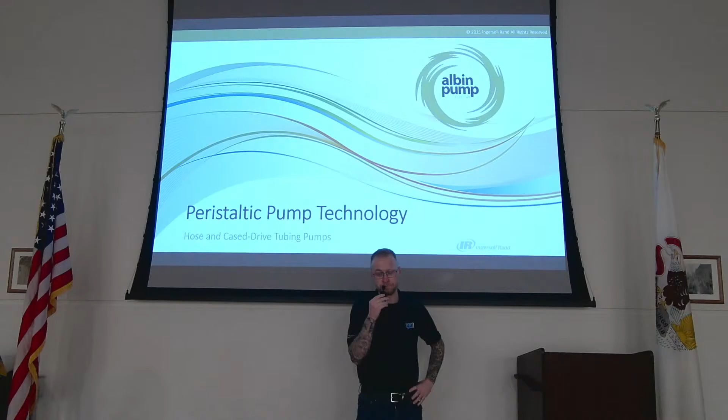I've got two speakers with me today. I've got my friend Sean and Charlie, who will be on after him. Sean is going to be talking about peristaltic pump technology, and Charlie is going to be talking about some big bubble mixing technology.

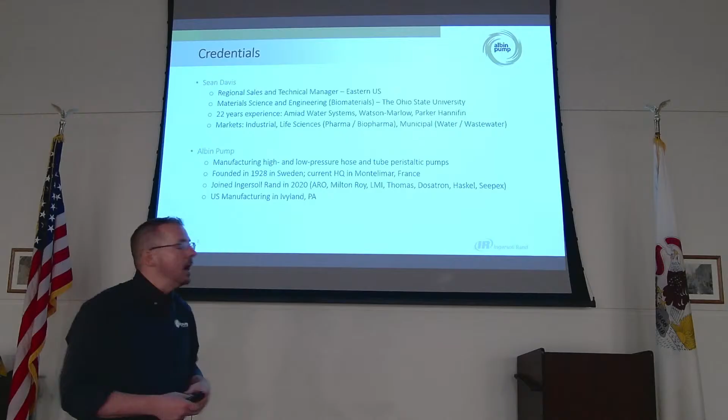So our little niche within Ingersoll Rand is Albin is focused on peristaltic pumping technology. You may be familiar with Ingersoll Rand and know them for their compressors or other brand names that they have, specifically Milton Roy, LMI, Aro. But again, this is just one of the different pumping technologies that we offer.

So Albin was founded in 1928 in Sweden. The manufacturing current headquarters is now in France. We also have U.S. manufacturing just outside Philadelphia in Ivyland. So we know that's a big deal with certain projects that come through, especially anything that needs to be BABA compliant. We can meet that with certain of our products.

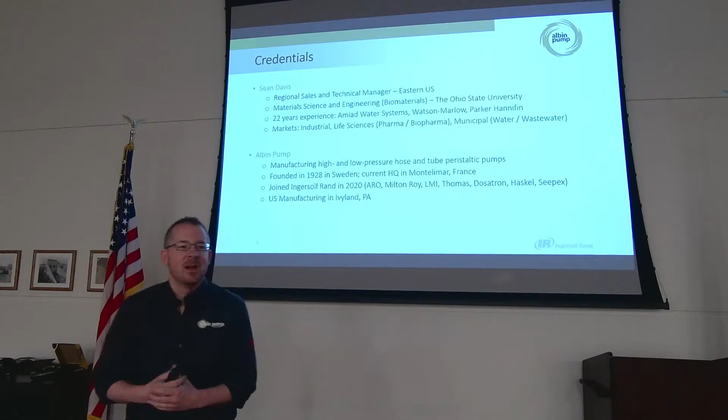But as far as myself, engineering background, I cover the entire eastern half of the U.S. There's actually 3 of us working for Albin. We actually all came from a competitor, but we're all ingrained into the pumping technology, and in specific peristaltic pumping technology. So we're going to talk about 2 different types that we offer, our hose pumps and our tube pumps.

Our hose pumps you're going to see are more for that high pressure transfer, wastewater treatment applications that you may have, anything that's got a viscous, abrasive, corrosive, fibrous product going through it. These hose pumps are what you're typically going to look at there. Whereas on our tube pumps, you're typically looking at the water treatment side for those types of applications. Those are a little lower flow, lower pressure, more of a dosing, more precise measurement of any of those chemicals that you're putting into your line.

So peristaltic working principle, it's a real easy one. The human body has mastered this with swallowing. That's the same thing, that's peristaltic technology. What we're doing is we're using 2 shoes on our hose pumps, or what we call rollers on our tube pumps. And what those are going to do, they're mounted 180 degrees apart, and they are going to squeeze the hose or the tube that's inside that pump head.

And so the compression, the squeezing, that occlusion of the hose is actually going to draw in any of your fluid, any of your material into the pump. And then it gets moved around as those shoes or those rollers continue on throughout the pump head. And then on to discharge for you.

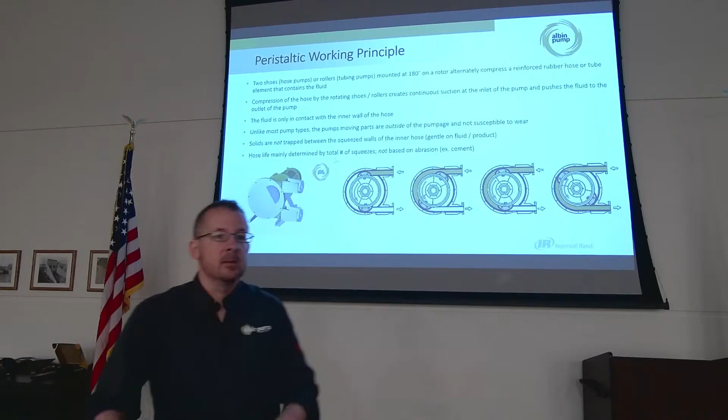So with the advantage to this, and probably one of the biggest selling points on this, why is this technology important? Well, 2 of the things we tout on this. One is your only wetted part, the only part that's coming in contact with your fluid is the inside of the hose or the tubing. None of the shoes, none of the pump, it's not susceptible to wear because it's not going to be immersed in your fluid. So literally your tube or your hose is the only thing touching your fluid in your processes.

What's nice about it is it's actually a gentle process. Outside of what you see with municipal wastewater, water treatment, this is a big technology for biopharm where you can't lyse the cells. You have to be gentle with them. Olives, fish. I mean, it's all things that have been used in the peristaltic pumping technology world simply because it is a gentle process.

Your hose life, this is a nice point here too, and something I want everyone to know, is your hose life is mainly determined by the number of squeezes of the tubing, not by the abrasiveness or the fibrous nature of your material or your fluid going through that.

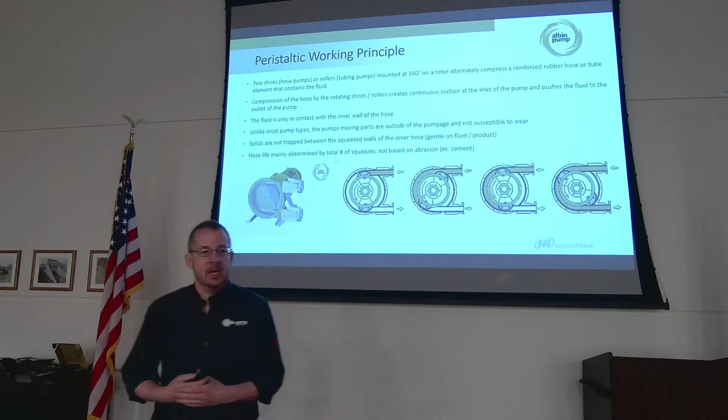So based on the number of squeezes, that's where you're going to be looking to do your hose changes or your tubing changes, not based on the material that you have inside. So we have different types of hose and different types of tubing that are meant to be chemically compatible with any of those chemicals that you may be using as well. So it's a variety of hoses or tubing that we do offer.

By a show of hands, anyone use peristaltic pumps now or familiar with them? Okay, cool. So I like that. That's good.

So we already talked about how it's the one wear part. It's that hose that you have. The advantage to this is the pump can be repaired or maintained in place. There are some alternative brands where you actually have to send in the pump to get it maintained or get it fixed. Here, you're able to replace that hose on site. You don't have to move it. You just want to ensure that there's a minimal distance, and I'll show that later, for being able to put that hose in or take the hose out from your pump.

But an advantage to peristaltic technology is that the pump orientation or port orientation is any one of 90 degrees. So it's meant to be able to be put in place where you have the space. You don't have to create the space for it. We offer different port orientations to allow for ease of operation, ease of maintenance, and ease of putting it on site.

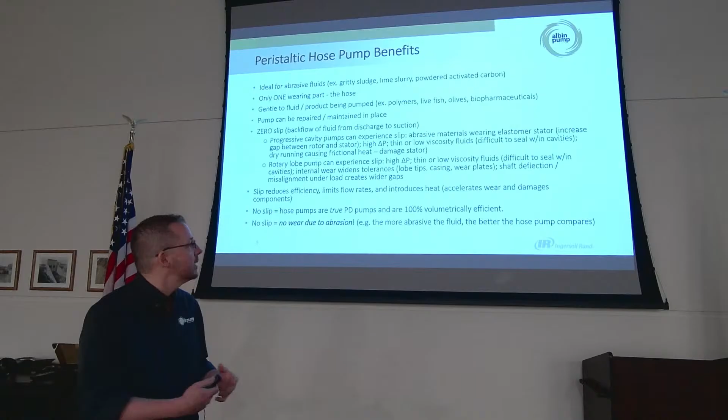What you see with peristaltic technology, it is truly a positive displacement pump. It means you are moving 100% of the fluid through. You can recover all of that fluid as well. If you ever have a blockage or ever have an issue, it can actually be reversed in place. There's nothing special needed for that, so you can actually clear the line. You can remove any of that fluid that you have in that pump head, so you are truly getting 100% flow or fluid movement.

It also can run dry, which not a lot of the other pumping technologies can, and you will not suffer vapor lock because it can move those gases through the line as well. So a couple advantages to the peristaltic technology there. So I've already mentioned a few of these things here. No wasted product, no seals to leak or to wear out on these pumps.

What's nice is that, again, we talked about some of that bigger material. You can have up to 65% solids that can be pumped and material that's up to 25% of the internal diameter of the hose. So there's a wide variety of sizes of these hose pumps. So if you had one of those applications where you're getting a lot of fibrous material through or a lot of sludge coming through, these are able to handle that without difficulty.

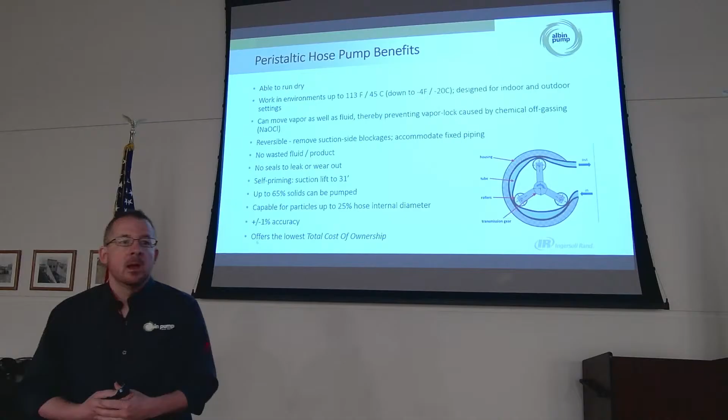With putting peristaltic pumps in place, you could get up to 31 feet of head vertically. Horizontal distance isn't as much of a consideration, but one of the best practices for peristaltic technology is you want to get it as close to your application as possible. It is more of a consideration when we're talking vertical distance, not necessarily horizontal distance. It will pump what you need horizontally.

So you see in a picture here, this one actually has 3 rollers. We offer some 3-roller peristaltic pumps, but we find 2 shoes or 2 rollers inside is going to be a best practice here. The simple reason for that is the more rollers you put in, the more squeezes you're going to have, and then you're going to wear your tube life faster. And again, that's what we're trying to avoid.

Claim to fame for peristaltic technology is that it's going to be operator friendly, maintenance friendly, and low maintenance time to simply change out the hose or tubing. A majority of the peristaltic pumps out there utilize the 2 shoes or 2 rollers so that they can put through as much fluid as possible for that size pump, as well as not squeeze the tubing or the hose more than is necessary. Any questions so far?

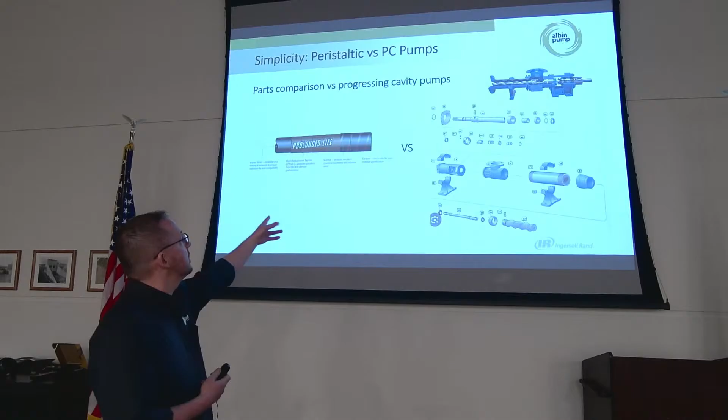So some of the advantages that you'll see here versus some of the other technologies is literally your only wear part, we've just talked about this, is going to be the hose, whereas you have a lot more parts that you have to worry about maintaining on, say, progressing cavity pumps, the stator wearing out, burnout. It's literally just the hose that's being changed on here.

And what I'll show you is a list of what the maintenance is on the hose pumps, and really it's just visual inspection. Okay, you're going to change the hose, but you're going to just inspect the other parts visually. They're good, and then you can move on. It literally is, the majority of your time is just going to be changing that hose.

Another piece of ancillary equipment that's not needed versus a progressing cavity pump is going to be the pressure sensor and the stator temperature, because if that does not have fluid in it, it's going to burn out, it's going to wear out, you're going to have to change it. There's a lot more parts that need to be changed on that versus just a hose or a tube for peristaltic pump technology.

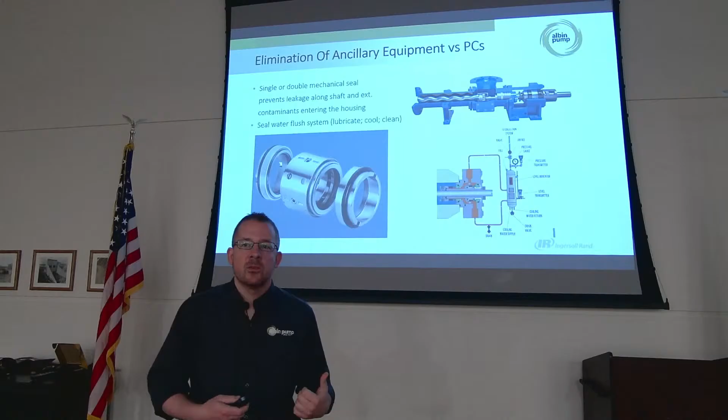Similar again here, more ancillary equipment that's not needed on peristaltic pumps that you're going to find on our competitive technologies. In this case, it's the mechanical seals, and those aren't necessary for peristaltic technology. Remember, the squeezes or this closure, the shoes closing or the rollers closing, your tube or your hose is acting as that check valve as well. So there are no temperature or pressure fluctuations, anything you need to worry about having ancillary valves to make sure that that is not something that's going to be a problem in your line.

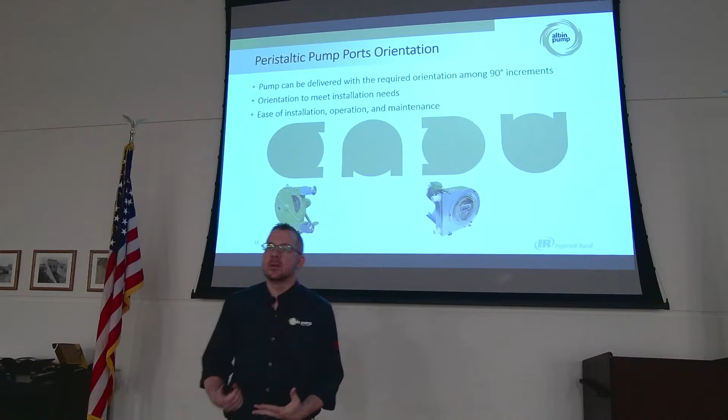We mentioned this earlier, the different port orientations. This is going to allow ease of operation, ease of installation, ease of maintenance, so that you're able to set it easily in place where the pump is needed. So what you see here is a wastewater treatment plant lime milk application, which showcases the fact that we have different configurations for the gearbox as well. So if you're space limited, peristaltic hose pumps can be arranged in such a way to make them more vertical rather than more horizontal with that gearbox. So you got the right angle reducer on there as well. So another one of the capabilities that peristaltic hose technology offers.

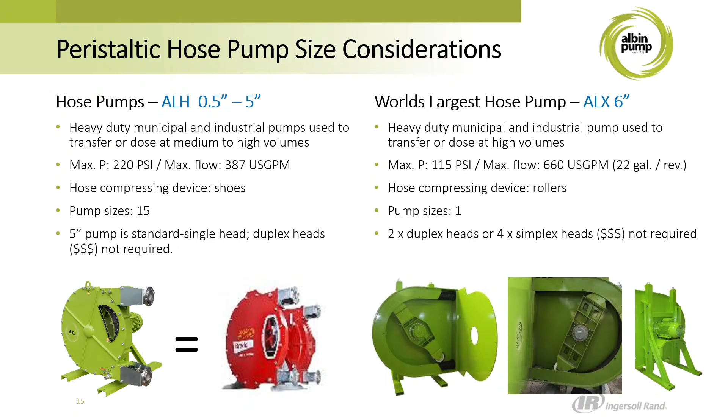The one thing I want to mention on this slide right here is the ability to have multiple hose pump sizes available. Because again, what you want to do is you want to run low and slow. But in that case, if you have a higher flow application, some of the competitors, they offer duplex systems. Well, that's just adding more floor space. That's just adding more metal that you're paying for in the pump housing itself. So if you're able to take care of that with just one pump rather than having a duplex system, it's typically going to be better for operators.

And again, just to see that these go all the way up, hose pump technology is able to get up to about 220 psi. These are your higher flow, your higher pressure applications. We'll talk about tube pumps, more dosing, more metering in a bit. But you could see you could get up to 660 gallons per minute on this, which is 22 gallons per revolution on that pump on the right, the largest hose pump that's offered out there. It's massive. It's bigger than me.

Some of the recommended accessories we state for this technology is going to be your leak detector. On tube pumps, it's inherent, already included in there. On the hose pumps, it is an accessory after the fact. But this way you just ensure that you're forewarned, or there's an alarm triggered if for whatever reason there is a leak in the system.

And unfortunately, we do see it simply because we forget to check on the pump. We forget to see when it's actually going to have a hose burst or a tube burst, when it's just run too long. This way, you can be warned about it if there is any leak detected.

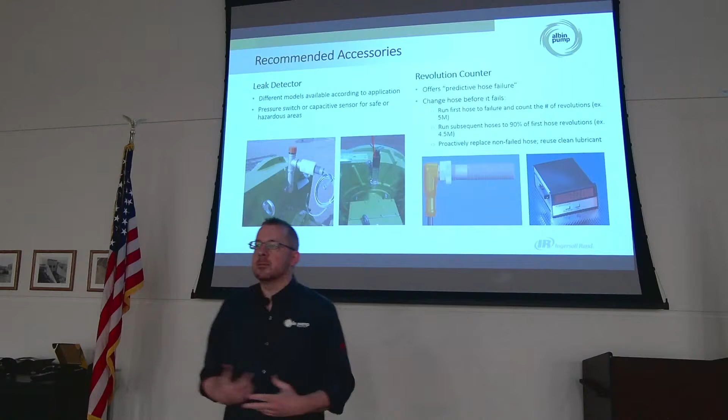One of the things to pair with that is our revolution counter, which is going to offer you predictive maintenance. You're able to run your first hose to failure. And then you can dial that back to about 90% is what we recommend. So if your hose burst at 5 million revolutions, you dial it back to 4.5 million revolutions, and that'll give you the predictive failure mode. So you won't have that leak, or you won't come close to that leak. So paired with the leak detector, it's just a way to protect your process.

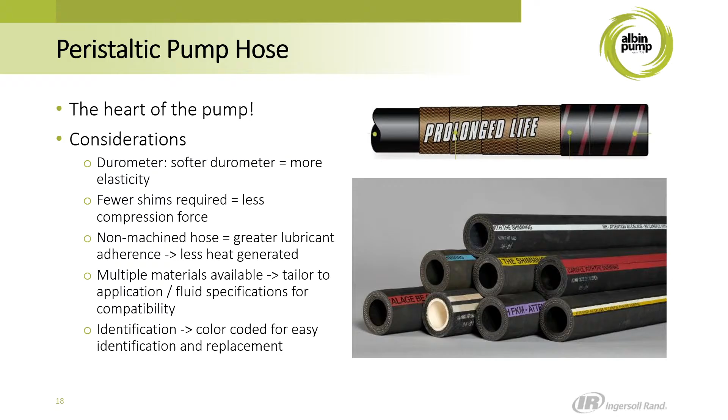Again, I keep going back to the hose, but that's going to be the heart of the pump. What I want people to understand is this is where you're going to get your performance. This is where you're going to get your expectation of what you need your process to do. It's going to be the hose. It's going to be the tube. It is not just a commodity product. It is going to be the driver for you getting what you are expecting out of your peristaltic hose technology. It's the most important part of the pump.

What are some of the considerations for hoses or for tubing? One is going to be chemical compatibility. As you see in this picture, it shows a variety of different materials to ensure that it is chemically compatible with whatever application you have. Something that's nice too, not just on ours, is they're easily identifiable by the custom color stripe on it. But again, your durometer, your hardness, is what's going to judge this performance.

Why is that important? Well, that's going to determine your restitution or your bounce back for the hose. If it's too hard, it's not going to bounce back enough, and then you're not getting that full internal diameter of flow, or your product going through that ID when it's still closed and not restituting. Then you can have blockages. So this is why I'm saying the hose, the tube, is going to be the driver for your process.

One of the things you always want to consider is going to be warranties. There's 2-year warranties offered. There's 5-year warranties. There's warranties on the gearbox. This is important to note, because not every company is going to be the same. What you will find is not covered are going to be your hoses, ball bearings, wear rings, any of that stuff that may wear. But on the gearbox, on the pump itself, warranty considerations are something you want to take a look at, because not all competitive technologies are offering that full warranty.

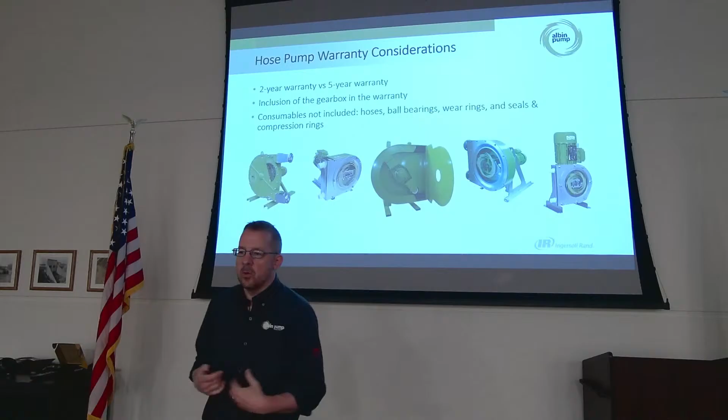Do you want to play this video, or am I able to play it? Oh, wait, I went back. How do I play it on this? I think you just click like you're going to move to the next slide. Yeah. Okay, it's not playing for me on this. Yeah, it's different. Okay. Yeah. Sorry about that.

There you go. Thank you, I appreciate it.

Allow enough maintenance space between the pump connections and the wall or any other equipment. The maintenance space is the minimum required distance for an easy hose replacement that depends on the pump size. The hose is the only wearing part of the pump.

When pumping critical products, for example, expensive or aggressive substances, it is recommended to install a leak detector for an added level of protection and to stop the pump should a leak be detected. Albin Pump offers a complete range of pressure switches or capacitive sensors for the complete range of the ALH series. Combined with the optional revolution counter, preventive maintenance of the hose is possible.

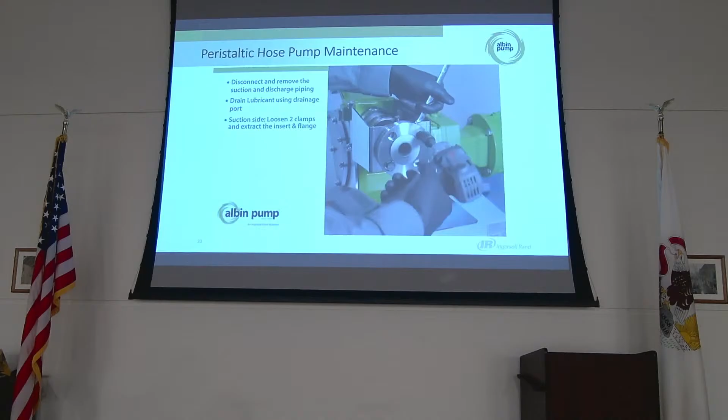To begin the hose replacement maintenance process, the suction and discharge piping must be disconnected and removed. The lubricant must be drained from the pump casing using a drainage port. At the suction side, loosen the hose sleeve and hose insert clamps to extract the insert and flange. Proceed to the same action at the discharge side and remove the flange brackets.

Run the motor at jog speed to remove the hose from the pump casing. If necessary, remove the pump cover and clean the pump casing to remove any residue of lubricant or hose. Reassemble the pump cover.

So what's good about this, if you don't have a leak and you're just doing preventative maintenance, you're changing the hose, you can actually reuse that lubricant. We say to change the lubricant every 5,000 hours of use.

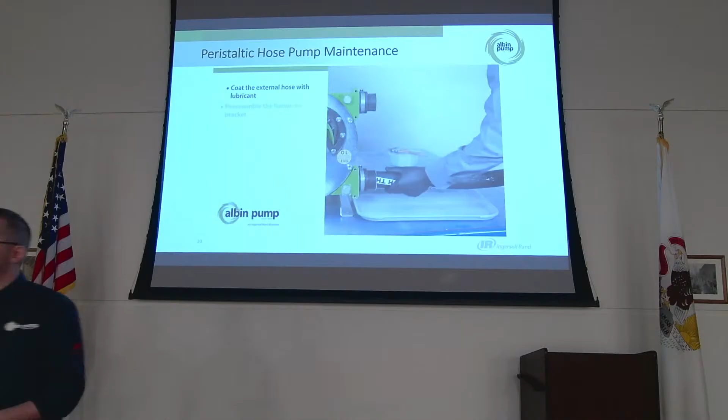Assemble the flange on the flange brackets and insert the hose, coated with lubricant, by the discharge port. Reverse the direction of rotation and run the motor at jog speed. The shoes will compress the hose and will push it to the suction side. The insert must be assembled and the clamps tightened to ensure the correct position of the connection assembly.

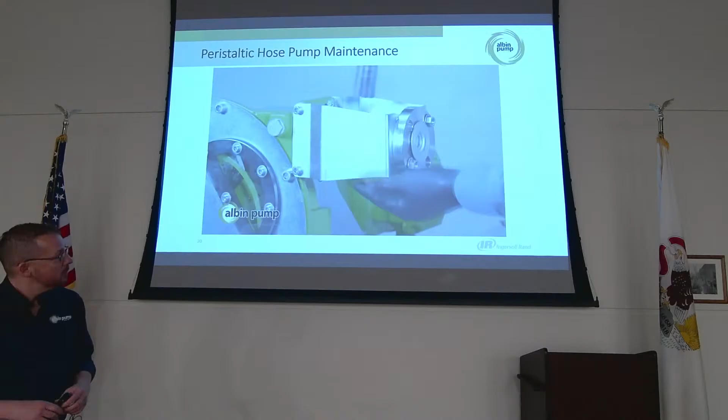For the assembly process, refer to our manual to check the correct tightening torque to apply. Proceed to the same actions at the discharge side.

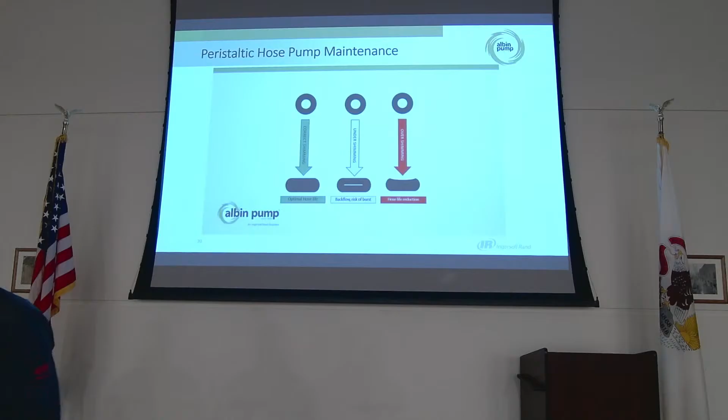So what they're going to talk about coming up here are shims, or shimming the hose. Any company is going to give you the recommended number of shims to put in, but it plays a vital role in properly squeezing or closing the hose. Incorrect shimming considerably reduces the hose lifetime. The number of shims depends on the pump size, the speed, and the back pressure. Refer to the Albin shimming table to set up the right number of shims and get the maximum performance of your pump.

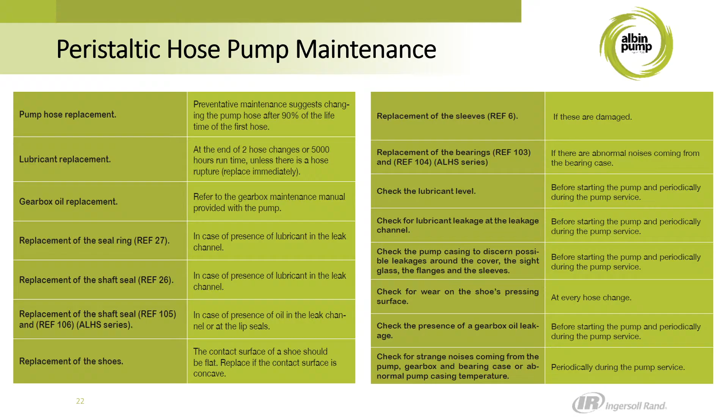So as I stated, there's about 14, I believe, steps here of what you would typically look at in maintenance, and only one of them is going to be the predictive maintenance, and that's the pump hose replacement or the preventative maintenance. The rest of these, you're just checking when you do your hose change or when you have the line down, looking for any type of wear, discoloration, or leak. But again, the main thing you're going to be doing to maintain these pumps is simply that hose replacement.

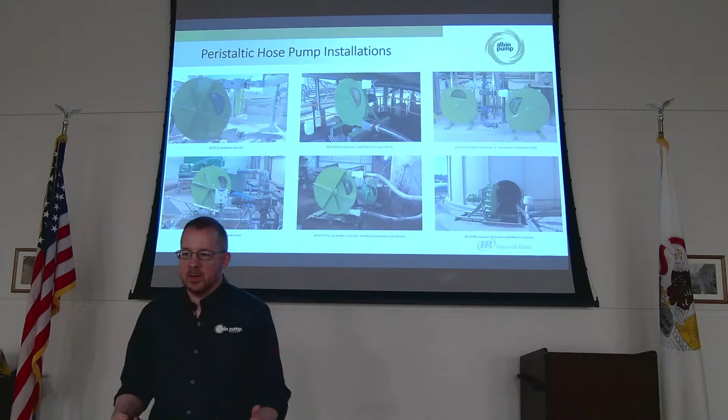You don't get a lot of pulsation with the peristaltic pumps versus, say, a diaphragm pump. But again, these are just some of the best practices that not just us, but anyone doing the peristaltic technology has come out with. So this is the one I was showing that does the 22 gallons per revolution, just how sizable it is. But again, we can do custom skids, inside-outside placement, trolleys, anything to help. People are going to manufacture those and make them available as accessories.

So now switching gears a little bit more to the dosing and metering side. It's really the same, just a smaller package. Lower flows than hose pumps, more accurate, higher turndown, which I'll touch on in a second here. But these are going to be more your dosing, your water treatment applications. And you're seeing two different types of the peristaltic tube pumps that we offer, but similar to what you're going to find from others doing peristaltic technology for metering pumps.

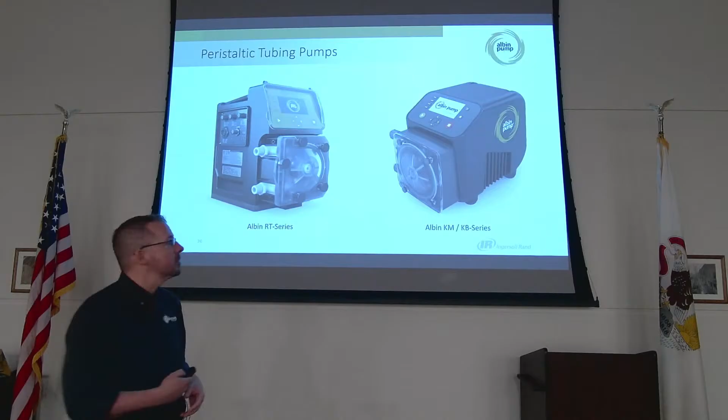Again, you're seeing the same thing as you saw. In this case, it's going to be rollers. It's more of a gentle compression than with the shoes on the hose pump, because obviously the hose is going to be a lot stiffer. It's going to require more force. On these, it's just your tubing, you don't need as much force, so we go with the rollers here, even more gentle than the shoes.

Now, it may look like we have 4 rollers in there, but only 2 are compressing. You'll see that in peristaltic technology. Those are guide rollers, the ones that aren't actually closing the hose. So I didn't want anyone to think I was lying to them about using only 2 before and now showing something with 4. That's not the case here.

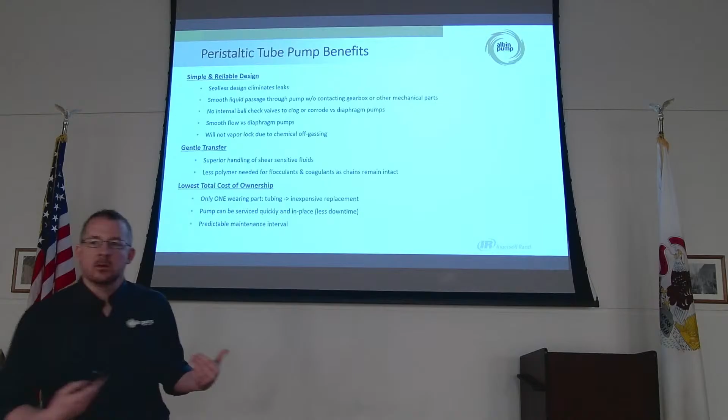So all the stuff I've talked about before, I don't need to rehash in the best interest of time. But the most important things are down here. The lowest total cost of ownership, simply because all you're doing is changing that tubing element. So your wear part, same thing for the peristaltic tube pumps as the peristaltic hose pumps: your tubing is going to be your only wear part.

But what's important on something like this, we have another advantage to peristaltic tubing technology and peristaltic tube pumps. That's operator safety. This is something you want to consider. The technology is similar, but not all pumps are going to be made the same. There are some peristaltic tube pumps out there where it's a 24-step process, the rotor's actually moving while you're changing the hose, and you can break a finger. And I'm going to show you warnings up there.

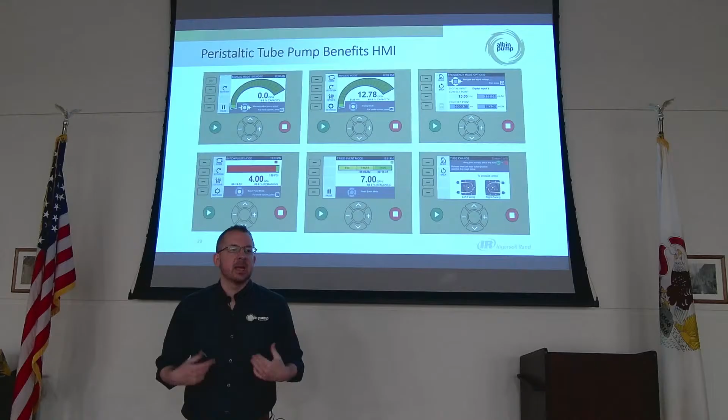So what you want to consider is the operator safety aspect of it, keeping your hands away from the rotor, and the rotor being actually stopped when you go ahead and change that tubing, which I'll show here in a moment.

So with diaphragm pumps, that's going to be more of a competitive technology to peristaltic tubing. What you're going to find is the fluid remains in the tube, so it's less parts that you have to maintain. That's the claim to peristaltic technology. You've heard me repeat it quite a few times, but that's the important thing to note here. Much better at moving the abrasive, the aggressive, the viscous material as well versus a diaphragm pump. Again, no seals, it's self-priming, all just advantages to using that technology versus using diaphragm pumps, which a lot of people are familiar with.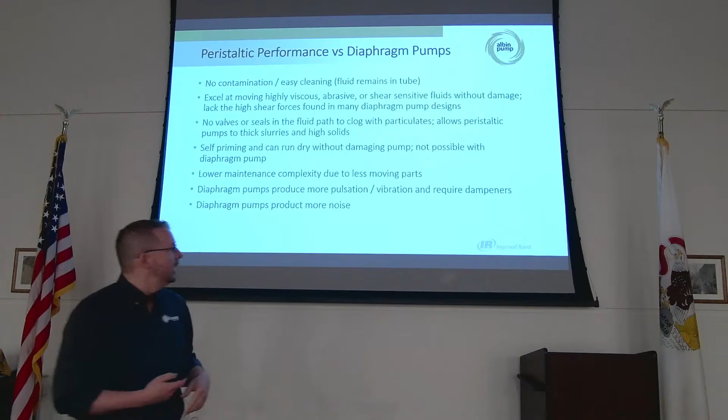And, again, the ancillary equipment, there's a lot more vibration, there's a lot more noise. On even our hose pumps, the larger hose pumps, you want something that's not going to be harmful to your ears. So I know just in our case, the noise level doesn't get above 60 decibels, which is office conversation.

Unless your office is really loud, I don't know.

There's a different type of peristaltic technology that is relatively new, and one that if you use the dosing pumps, you may have seen this before. I'm not going to name any names up here, but it's what we call a cartridge head. And so the lubricant, the tubing, the rotor, everything is set inside the cartridge, and that entire cartridge gets replaced. It's still peristaltic technology, but now everything's self-contained within the cartridge.

Well, it's different in terms of that entire cartridge needs to be replaced. And there's no bleeding your fluid out of that cartridge. There is a valve there, but it's only for pressurization, and that's it. There's no way of getting your fluid out. If you have a leak, you have your material in there, you have your lubricant in there, where's it going? It's going to landfill. It's not very sustainable.

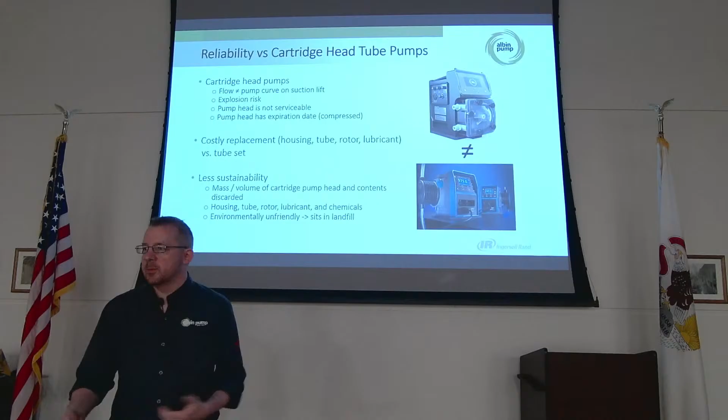Whereas with peristaltic tubing technology, that is not the cartridge head, you can completely drain the liquid out of the tubing, and you're just throwing away a much smaller part. And the cartridge head's about 10 times more in cost than just the tubing element. Just going to say that.

So the reason you'll see a dual, there's single or there's dual tubing elements out there. Well, the advantage to dual is you're doubling your flow while keeping it in the same pump head, same size pump itself. So again, if you're doubling your flow capabilities, you're not having to squeeze as much. You're extending the life of your tubing. And again, much better total cost of ownership.

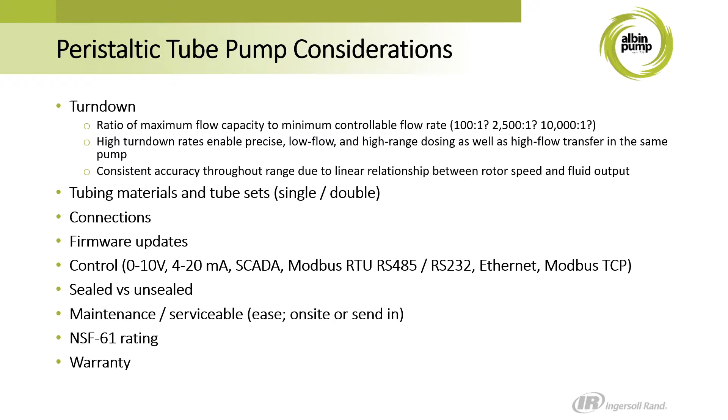There's just a lot of different accessories, considerations, things that you may want to keep in mind. What's your communication? Sealed versus unsealed. Is it serviceable on site, or do you actually have to send it in? Yes, there are some tube pumps that you have to send in to be serviced, and I mean that just kind of defeats the purpose of ease for the operators.

One thing I want to say though is turn down as well on hose pumps. That's another thing. You're looking at like a 50 to 1 turn down, 10 to 1 turn down. On the pumps for municipal, for peristaltic tube technology, you're looking 10,000 to 1. It gives you a wide range of flows that you're able to accommodate.

And it gives you that precise dosing because you are getting the same amount of fluid with every rotation of that rotor, of that pump head. And so it's very predictable. But also, again, wide range, higher limit and down to a lower limit of what you can achieve for your flows.

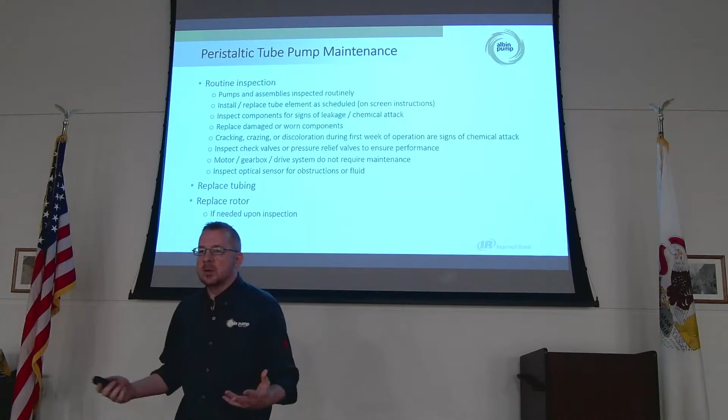So again, this is similar in the fact of it's just routine maintenance. You're changing out your tubing, but you're just doing a visual inspection. Does everything look good? Have there been any leaks, any discoloration? But a majority of your time, you're just changing out the tubing element.

So one of the technologies you'll see, I talked about operator safety. First of all, having the maintenance manual on a pump is going to behoove you. You know, who wants to carry the maintenance manual around, and most likely it's going to get lost. So now you have everything self-contained within the pump itself.

What's nice about this is it takes you through all the steps. It's also going to keep your hands away from when the rotor does move. You'll see what I'm talking about here in a moment. But then the rotor is not moving at all when you actually physically put the tube element in, so it is now safer for you.

No. Yeah, let's do this one. So this will show you an example of what I was talking about.

I'm sorry, I just went back to it, so I need to get it to play again. I don't know what you did. I'm sorry.

Thank you. Sorry about that.

So what it's showing you is you're putting your fingers up at top. You have to engage both of your hands so it's not by the moving rotor.

I'm almost done. Almost done.

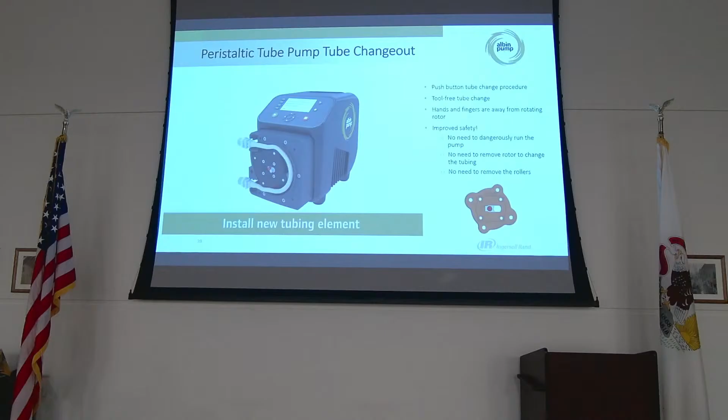So for those of you that have had to replace one of these and have had to put your finger in the way of the rotor, you can break a finger. Seen some gnarly things happen, believe it or not. So the fact that it is not moving during that is pretty beneficial, if you ask me.

Yeah. So this is the example I told you. This is taken directly out of a different manual. There's the safety warnings in there. Some of the changeouts, you need to utilize a tube changeout tool, which can easily get lost. So again, one of the considerations when choosing which particular type of peristaltic technology you want to use, these are all things you want to think about because again, this is how you're going to be spending your time after the pump is in. It's just really replacing the tubing itself.

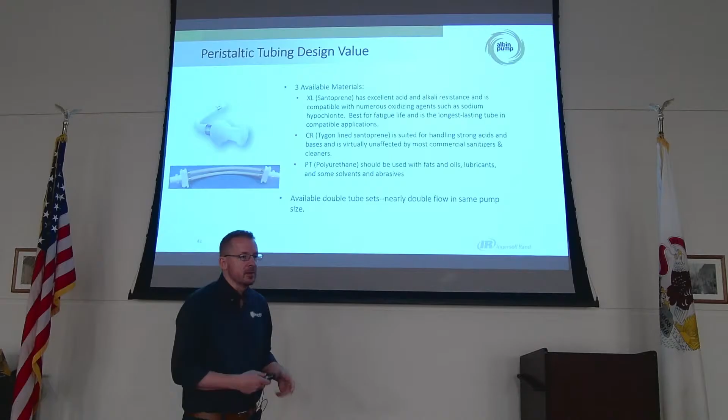This is just an example to show it doesn't matter what you're pumping, what your application is. There's tubing that's manufactured for it. Whether it's more of an aggressive chemical and needs a reinforced tubing, or if you're operating in the presence of fats, oils, and greases in more of a petrochem type of tubing element. But manufacturers are going to make it so that there are options available to you depending on what your actual application is.

Similar, I briefly mentioned it with the hose pumps, but one of the availabilities for you is peristaltic technology. Fits nicely in standard and customized skids for you, whether there's simplex, duplex, triplex, even quadruplex, which is one of the recent ones I just did. But custom configurations available for you, standard configurations available for you, but all self-contained, all small footprint, so that's not taking up valuable space.

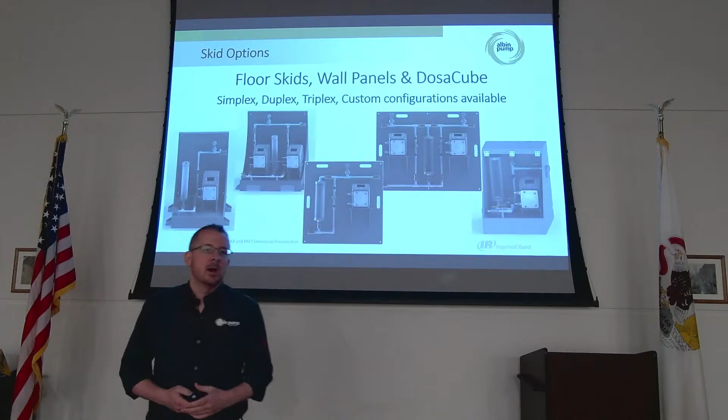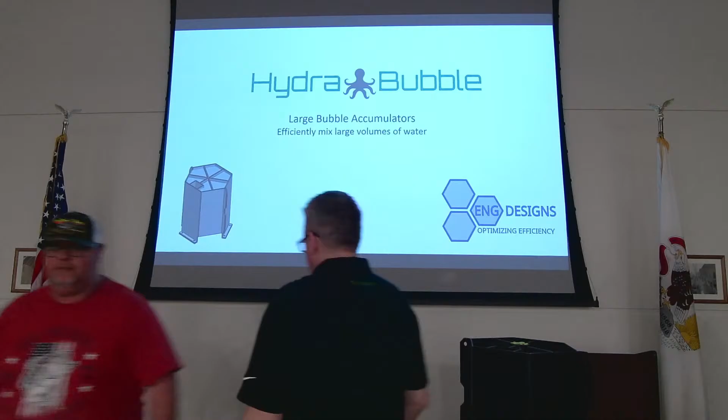Literature. We got. I'll pick it up and stuff. We can put a table. You want to put it on the table real quick? Yeah, sure. Yeah, I'll pass those around. Yeah. Maybe just put it off to the side there so I can walk around in front, maybe. Let me see if I can even. I mean, it's not a big deal either way. Yeah, just when he goes over, I'll just move the camera. We'll be okay. Drink of water. No, that little guy there does work. So if you wanted to put it in your fish tank out there, it's far more impressive when it's a lot bigger though.

All right, everybody. I'm going to get started with the second presentation here. We're going to switch it up a little bit. This is going to be on some big bubble mixing. Going to introduce my friend Charlie here. He's from Milwaukee, but we still like him, so that's okay. He might have a little funny accent, so just give him a break, okay? In all seriousness, though, Charles is a very smart guy. Very interesting technology. I think you guys will like the low pressure aspect of it. You guys probably have seen something similar with a high pressure system. So I'll let him do his thing.

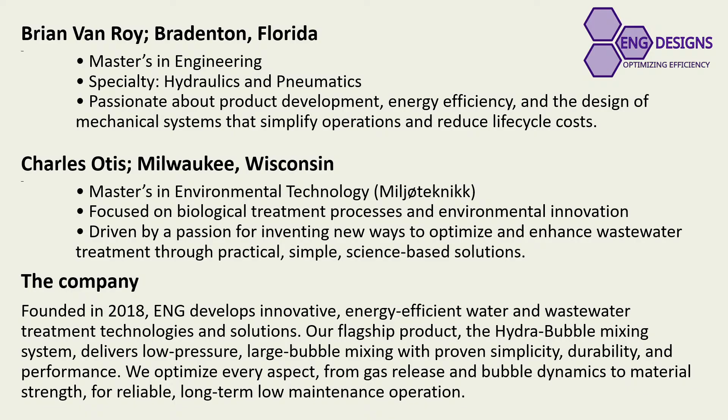Went to Wisconsin and then ended up going over to Norway to do a master's degree there, and then worked several years in Oslo for a company called Aquateam, basically doing R&D work. I did a lot of piloting. They would send me around all over Europe just because things tended to work when I was around. So got to tinker with a lot of different technologies, a lot of process, a lot of things like that.

And then together we started this in roughly 2017, 2018. I started in my garage, basically making these things out of PVC tubing with a heater to bend things, and epoxy, and it was a mess. But things have come a long way since then.

So our product is a large bubble. The units themselves are here. This is a working unit. We would install this right now. Basically, you can think of it as an extreme coarse bubble mixer. So we're making a very, very large bubble, which creates a lot of upward moving flow, essentially. So it's very efficient in terms of actual water movement.

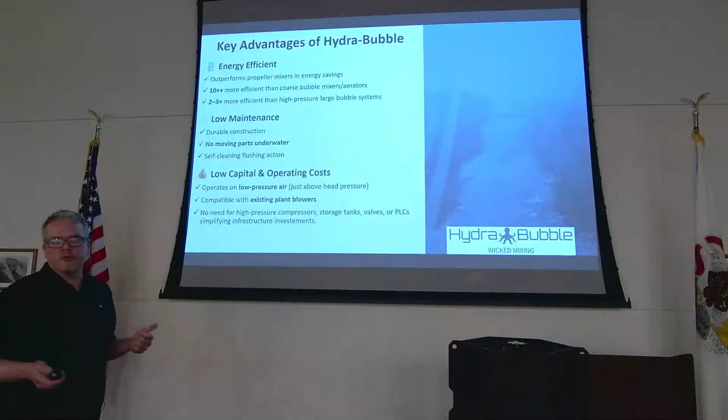So compared to just a coarse bubble mixer, where you're just blasting air through perf pipe, this collects air under the water and sends it up all at once. So for the movement of the water, we need about 10 times less air to do the same amount of movement that, say, a coarse bubble aeration system would do.

Compared to high pressure systems, you may be familiar with a couple of them, where they're just injecting compressed air into the water. Simply because we're not using all that compression energy, it tends to be more efficient than even those efficient systems.

Now, as far as maintenance goes, we have virtually no maintenance. We have no scheduled maintenance whatsoever on these. You put them in, if you give them air, they will make large bubbles. As far as wear parts go, we do use some diffusers that have roughly a 10-year life. Anything else is just piping, and everything else is above water. So blowers and things like that obviously need maintenance, but as far as in-water parts, it's relatively maintenance-free.

As far as capital and operational costs go, we tend to see our systems for, say, BNR conversion or something like that, are very, very cost effective on the front end, and then operational costs are very low just because it can be just waste air, plant air that you're already using for your aeration. So very cost effective that way.

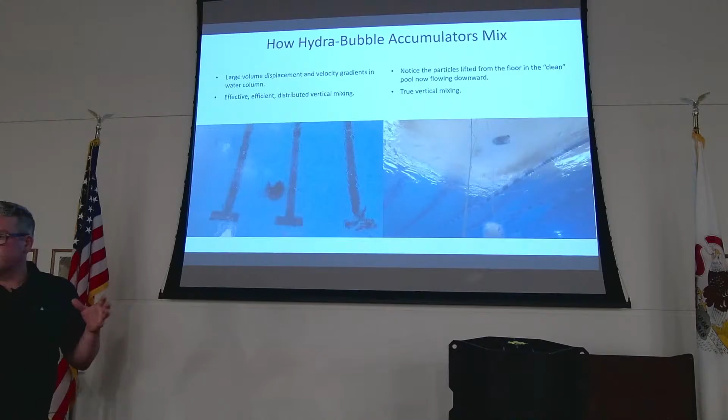So here's just a couple of videos. These are taken several years apart. The one on the right's the older one. We've played around a little bit with orientations and orifice sizes and things like that. Both of these are running off a 1/2 horsepower rotary vane pump. So just a little guy like this, full bore on, and the bottom of this pool is 12 feet. So we have these units mounted down at the bottom of the pool, just running an air hose down to them.

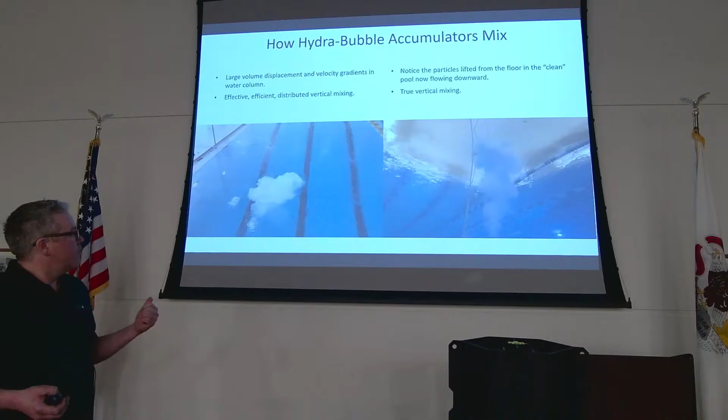They're affixed to a giant slab of concrete. Needs to be about 200 pounds to hold these down when they're full. Basically all that's happening here is we're just filling with air, and then it'll collect, and then shoot out a bubble. And you can see from the wall there to the lane line on the right side is about 18 feet. Just gives you a sense of scale.

And this is a swimming pool here, so gutters are designed to hold wake, right? You dive into a pool, gutters take all that wake. So if you do have a sidewall, a lot of that energy isn't dissipated out towards the gutters, so you get these currents that end up forming. The reason I like that video also is it shows the violence and the turbulence of the bubble when it comes up. This isn't a very clean swimming pool, obviously. If you put this in a digester or a dirty application, you can imagine the amount of turbulence you're going to bring up with that large bubble.

Charlie's going to get to it, but it's essentially an upside-down toilet, if you can imagine, that's how it's going to work. I'll let him keep doing his thing, but I just like that video because it shows how violent that bubble truly is coming out.

Let me see, how did you get the video to play again? I told you he's from Milwaukee, see? This one, so go back and then forward.

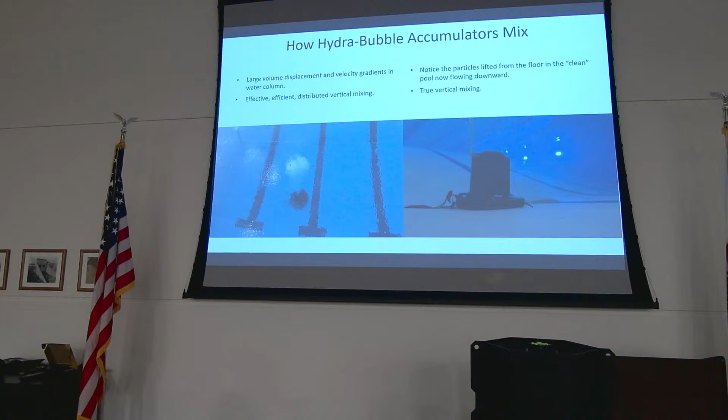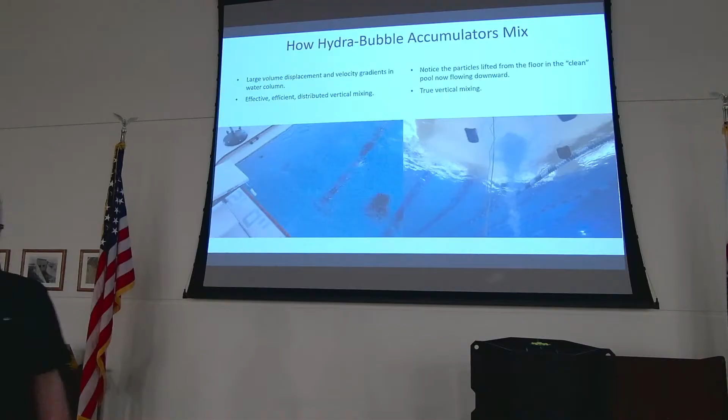There. Okay. So anyway, one thing I didn't mention here, you see these particles that are floating down in front of the video screen there. These were placed in a clean pool. This pool is filtered. It's literally grabbing stuff off the bottom and resuspending that in a clean pool. And we were mounted about this far off the bottom as well. So when you add these to, say, a wastewater application, say in an anoxic zone or something like that, you're really moving stuff very effectively around.

So how this works, I don't have the internals on here to show you, but basically this unit takes air, it bubbles up inside of there. So you can think of it as sort of like an aeration grid. So passively collecting air, so we set these on top. Air fills down until it reaches a critical point, and then once that happens, the air, basically, there's one path outwards, and as soon as that air goes out, creates sort of a low pressure zone. Bubble starts going out, water then rushes in and pushes the rest of that air out all at once.

Okay, so that bubble's then released, it sort of coalesces, and then is displacing a lot of water as it rises very quickly. The speed of a bubble rise is based on basically the diameter of that bubble. So the larger the bubble, the faster it's going to move through the water. There are obvious terminal velocities on that, but for this size of a unit here, we'll be rising at about 4 feet per second.

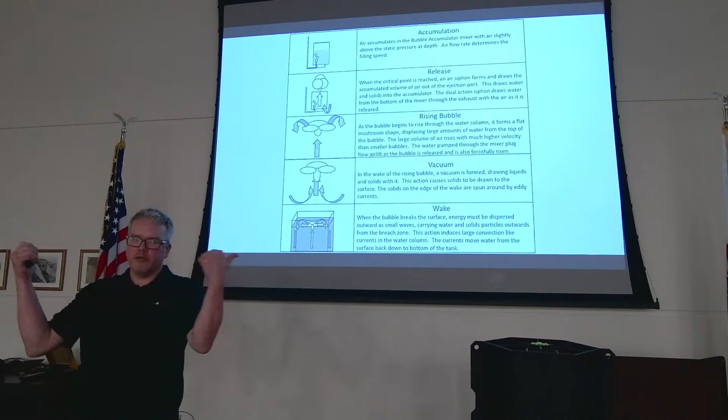So a bubble will then coalesce, sort of turn into an amorphic mushroom, and then pushing water out of the way, and then that sort of induces a vacuum up behind it. So then it's pulling water right from the bottom of the tank up to the top. Once that bubble reaches the surface, once that breaches, all that energy, the upflow, has nowhere else to go but outwards. So then it flows out radially from the center of that bubble until it hits something else, like say another bubble's wake or a wall. And then basically what you're doing is generating vertical convection currents in the water.

So this is very difficult to do a CFD model for an amorphic large bubble. But basically you're inducing a flow field from the bottom of the tank, pushing that up towards the surface in sort of a plume, and then the water then will return back down to the bottom of the tank, and you form these vertical convection currents in the water.

I'm going to pass this mini unit around again. Now that I've kind of explained how this works, it might make more sense. I probably should have waited at the beginning. Sorry about that. What was I going to say right there?

So you induce those convection currents, and it's very effective mixing. Other large bubble systems will do essentially the same thing. Depending on the bubble sizes, other systems have multiple units in an array. Others use just another large amount of compressed air at once. But all large bubbles work in almost the exact same fashion. It's just the formation of the bubble and how that's done. The bubble doesn't really care. It's doing the same work no matter how that's formed.

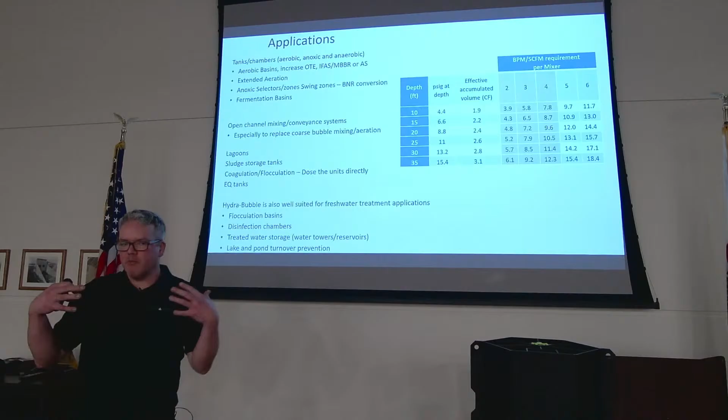So Henry's law, you don't have the diffusion into the water, whereas with fine bubbles, you want really tiny bubbles that stay in the water as long as possible to get that transfer of oxygen to the bulk water. The large bubbles don't do that. There's just not enough time, and the bubble's relatively small in that surface area just because it's like a giant blob.

Where else? So attractive applications for this would be, say, like extended aeration. So you can combine this with, say, a fine bubble aeration system and use the large bubble for the motive force of moving stuff around in the tank, and using the fine bubble as your efficient means of adding oxygen to that tank.

Fermentation basins are interesting. So if you're running a BNR process, for example, you can put your air supply on, say, a valve, turn that on and off as needed. So you could run a sludge blanket for a few hours, allow VFA formation, and then turn the bubbles back on, and they'll start to mix everything back up, move it along, and just run that in a cycle.

Channel mixing is very attractive, where if you have, say, just a long straight row of channel, you're using coarse bubble aeration right now, just burning through electricity with all that air that you're adding to it. Large bubbles will give you that motive force. You're using about 10% of the energy that you would be for that, and often there's an air header running along that line anyway, so you can just tap off of that and put these in.

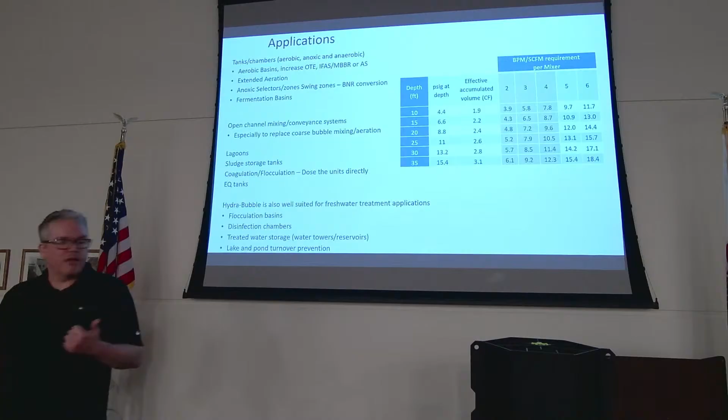We do not have NSF certification yet, but we plan to be doing that relatively soon. So for potable water applications, things of that nature, water towers, standpipes, things like that.

One thing I will mention now is with these units, if you've seen those little ones that I was passing around, we have an air line run to them, but we can also run, say, a dosing line with a peristaltic pump, for example, right into the unit. So every time that bubble bursts, you can dose chemical right into it.

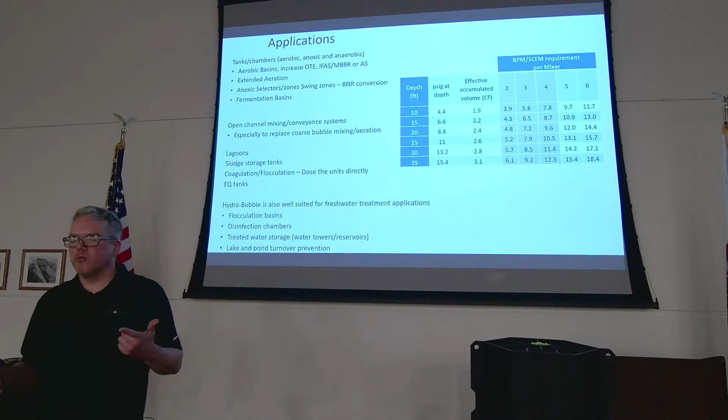That's entrained into that bubble, dispersing into the bulk fluid very, very rapidly, which allows you to potentially use less chemical because you'll have detection sooner. You'll see that disperse more evenly in a tank. So for like PACl or PASS, or if you're doing carbon addition or something like that, chemical additions, things of that nature.

Okay, so right now we manufacture 3 different sizes. This is our flagship, our 1.5 cubic foot unit. So this is about 11 gallons. Each bubble is 11 gallons. So imagine holding down 11 milk gallons underneath the water. You get a lot of force. You can't do it, because this will hold up about 200 pounds of concrete.

Smaller units, if we have a shallower tank, cut off roughly about 10 feet. If we have a shallower tank, we'll disperse them more frequently throughout a basin using the same amount of air. You just have more bubbles in different areas. The smallest units are still a large bubble, 3.5 gallons or so.

Those are specially designed to fit down like 16-inch manways. So if you had an HDPE tank or something like that where you wouldn't have access to put something this large into, we can put those units in there. And that's generally the specific application we'd use those for, but they are available.

Installation is super easy. Essentially, we're just bolting this down to the floor or to a ballasted piece. I think the next slide will show that even better. So this one I might have trouble starting because this won't go. Oh, there you go. So essentially that's the installation.

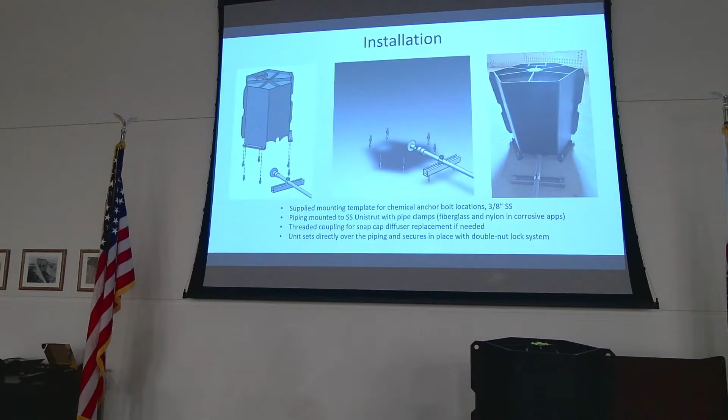We'll put chemical anchors in when we're mounting to the floor. Chemical anchors, you just bolt it down. And then we run an air line to that with the diffuser. And the diffuser is for, I'll talk about that in a second.

So we are completely agnostic to the type of tubing or pipe that's used. Can be stainless, can be PVC. We like to use PVC a lot simply because it is low pressure, and the installation is very, very simple. But if the plant requires stainless or something like that, we don't care. It doesn't really matter. You just make sure air's going to it, and it'll make the large bubbles.

And it's designed to be very, very simple, so not a lot there. So when we're running an array or a zone, essentially what we're doing, we'll run a single header down and then branch off. So the diffusers that you see there, we just use sort of a snap cap diffuser. That's to give a little bit of back pressure in order to evenly distribute the air to each one of the units. So we'll run a main header down and then branch off to each one of the units.

So if you had a zone, a tank, each one would have its own header, and then that would be your control there. So you can do an adjustment with the valve, turn things on and off, and you turn your whole zone off just from that single valve. They can be piped individually, but this is a lot simpler to install this way.

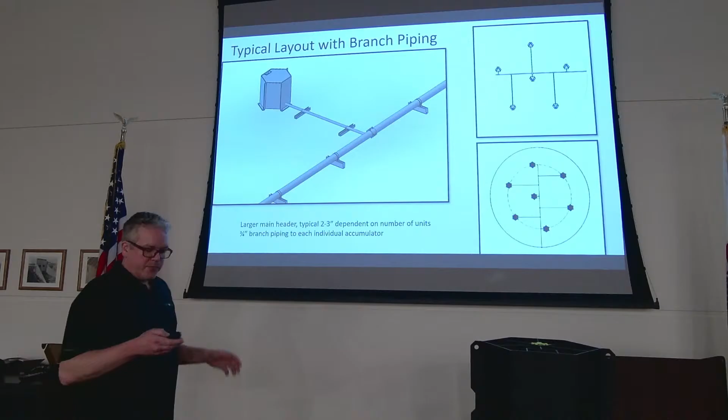Does that make sense to everybody? There's really not a whole lot to it. It's very, very simple. That's kind of the whole point of doing this, is just making it very easy, not a lot of moving parts, very low maintenance, still gets the mixing done with a lot less pressure. Just want to make sure everyone kind of understands it's very simple.

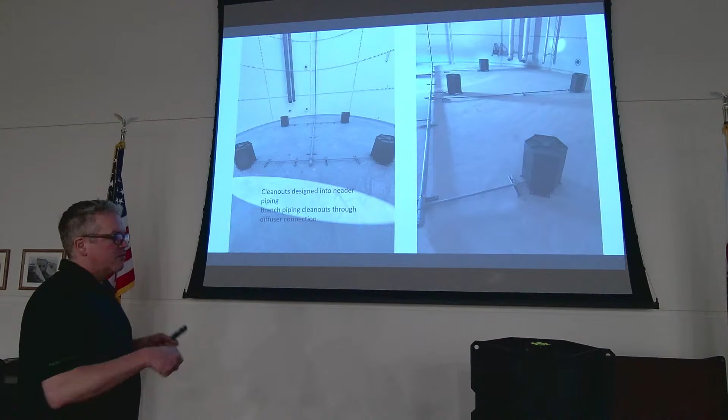But we'll always design in cleanouts for the piping itself, and then as far as that goes, the diffuser head there is your cleanout for the branch piping. And so if there was any maintenance to do with these units, all you'd have to do is unbolt them, or just take off the nuts, lift up the unit, and then do whatever you have to do. But there's no planned maintenance on these whatsoever. So just in different configurations.

So like I was saying, for channel mixing, for example, if you had a main header running out along the tank, you can just tap off of that on each one of them. We can run that piping down at the bottom, doesn't really matter. The 75-foot diameter just kind of gives you an idea of how many units you'd need. I think this was for some sort of sludge application down in Georgia.

Baffled serpentines, so bubbles aren't magic, they're not going to go around walls, so strategic placement is important. For us to design something, all we'd need is dimensions of the tank, your depth, your width, length, and then what you're trying to do in there. Gives us a really good idea, and that allows us to design that for you. A sense of scale here, so each one of those tanks on the bottom right there would be 20 by 40. So 4 units in that would do adequate mixing for, say, mixed liquor.

We call this hydrofusion. This specifically was a sludge tank. What we're doing here is adding aeration and having the mixing. We're using the same blower to do that. Basically we're just adding enough air to keep things from going septic, because the bubbles do not aerate very well at all. And so we can add those without being septic.

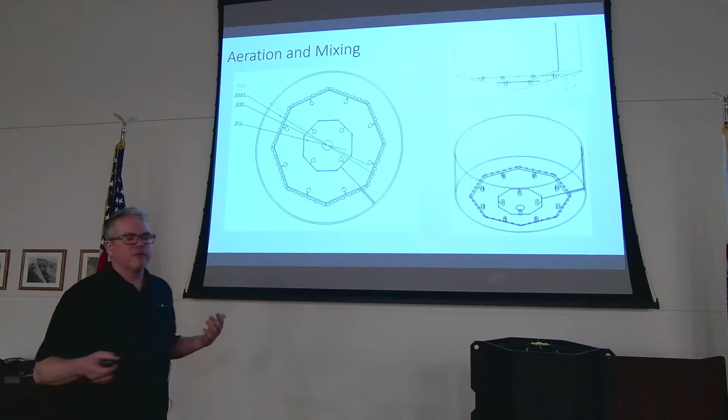This is an example of extended aeration. So basically an aerobic digester. One blower on a VFD will run all these units. So you get the mixing from the large bubble, you get the aeration, and it's just a continuous operation.

So some more videos here. So this was actually very, very early. This was taken in Waukesha, Wisconsin. The first iteration of our units here.

In I think 2018. So 18 feet of depth, they let us put this in the clarifier. I had just this little tiny pump. It was about, I think, 125 watt, so 1/6 horsepower little pump, rocking piston. So it only could fill this thing up every, I don't know, a little over a minute per bubble. But you can see the power of that bubble as it hits the surface.

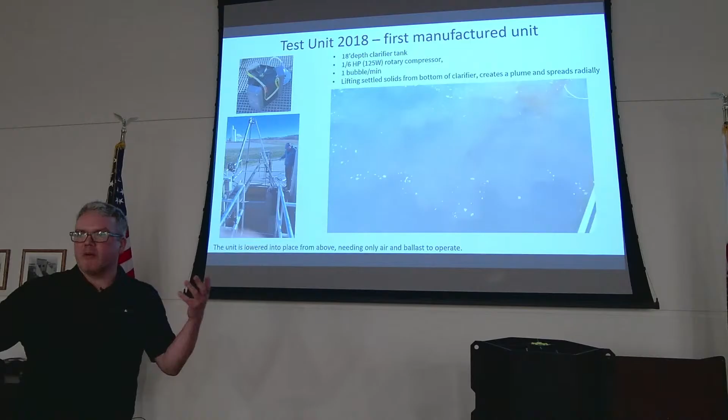And it's a little faded on the screen right now, but you can see that plume of sludge coming right up off the bottom of the tank. So in a tank of this size, for example, you'd need quite a few more units, but you'd also up the intensity of this. And you can see how that's going to continuously mix and well mix a tank of this size.

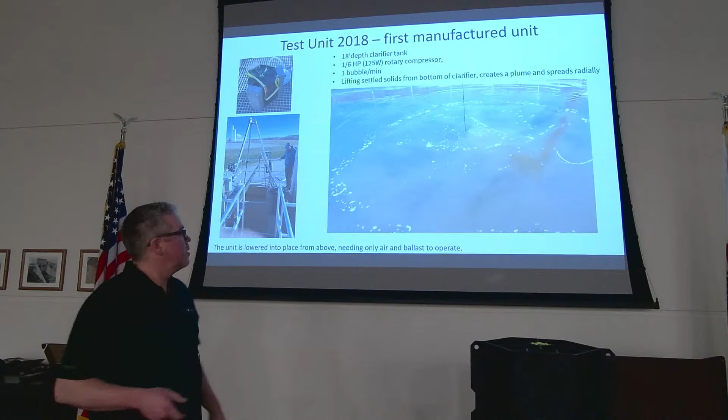As far as ballasting goes, we've been playing around with different configurations. Concrete's cheap, so we can mount those to the sides there. Turns out that's a little bit cumbersome. 350-pound weights of concrete. What we're doing now is, if we are adding these as a ballasted thing, drop in situ, we'll take a steel plate, powder coat that, weld points on there, and drop that down into the water that way. But installation is super simple.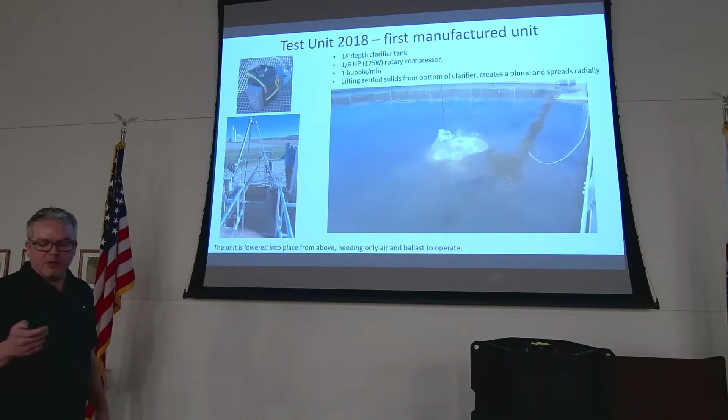Talking about the ballast here. So this is a ballasted unit, steel plate. We'll just mount the unit right to it. And this is actually one of our smaller models. So that handle there is just to be able to carry that around. So in, say, a lagoon application, you wanted to drop one of these down into the water, and then you went to go dredge it, you can move it around. Operators just take it out of the way and do what you got to do near there, and good to go. All right, so this is the cheese factory up in Wisconsin.

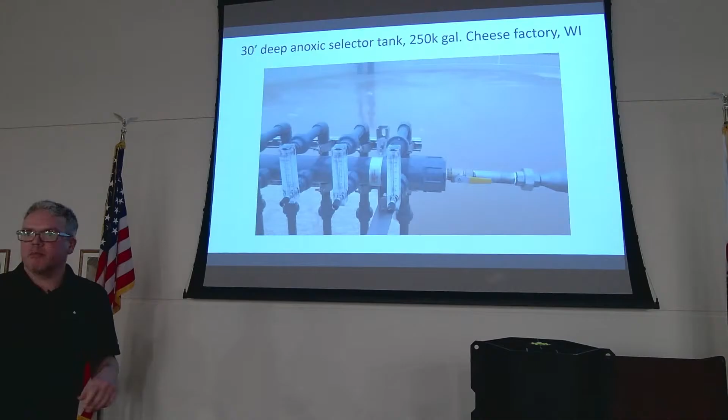Now this is an older unit, older installation. We don't do this anymore, but it's an interesting video to see here. So I don't know if I'll be able to restart the video, but with rotameters, you have both flow control, but you're also seeing your flow rate. There we go. So what you see here is that the rotameter is going to bounce. And what that's indicating is that a bubble is being released at the bottom of the tank. This tank was 30 feet deep, and we know when that bounces, a bubble is being released.

So that allows us then to count the time it takes for the bubble to get to the surface. It turns out to be about 7 seconds. In 30 feet, it's about 4 feet per second. So that large bubble is moving very quickly through the water until it hits the surface. And then you see that upwelling of water coming up.

No, it's not. This is wastewater. This is activated sludge. So this is just their process for post-treatment. But in the anoxic zone, they love it. We're actually installing another dosed unit there for flocculation. It's being installed this week, I think, right down to the side of this, where we're dosing in PAC to take out the phosphorus, and then they're running that water through a membrane.

This installation, super simple. We had just the units here. They didn't build the doghouse out yet, but two 5-horsepower blowers, really small, compact. They're nice. One was running duty, one standby. When you take a look at the VFD, I don't know if you can see it there, but 650 volts, and then 4 amps, roughly about 3.5 horsepower, is mixing that 250,000 gallons of water. So very efficient, and this is very deep water too.

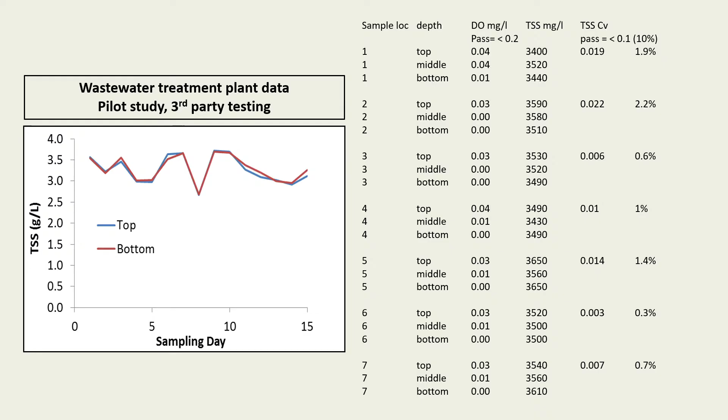Out in California, turns out my uncle lives about 20 blocks away from this plant, so it's pretty convenient. Go see him.

This is a pickle factory in Wisconsin. We didn't do any of the design of the header system here. Our scope was basically from the valves down in each of the tanks. So there's 6 tanks here, all identical, 12 feet diameter, 12 feet deep, and all those tanks back there are filled with pickles. They bought this compressor off of eBay, and then the header was designed by a firm in Wisconsin, but it's just a single 2-inch header running off and then branch piping to each one of the units.

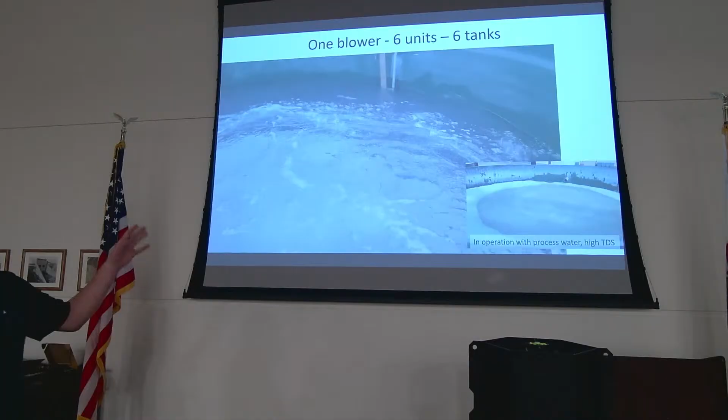So what I'm doing here is walking around. This was during commissioning, so all I did was open all the valves full on, and so we're running six different tanks, 1 air source, and basically no control whatsoever. I've asked them to put a VFD on there to slow this down a little bit because they're really over mixing.

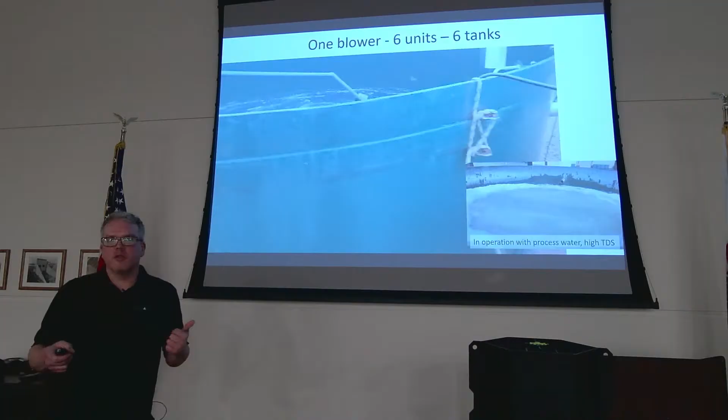But why this project was interesting: very corrosive. It was a saltwater brine; they're evaporating all this pickle brine, so they're not sending it to the plant. And this is the storage until they take it out to disposal, just keeping all that mixed. All the wetted parts had to be non-corrosive. So I'll go back here a slide.

So you can see here on the top right, PVC piping, fiberglass strut, there are nylon clamps on there, and then this unit was mounted to a fiberglass slab, and that was glassed into the floor. So these fiberglass tanks, completely non-corrosive and basically no maintenance whatsoever.

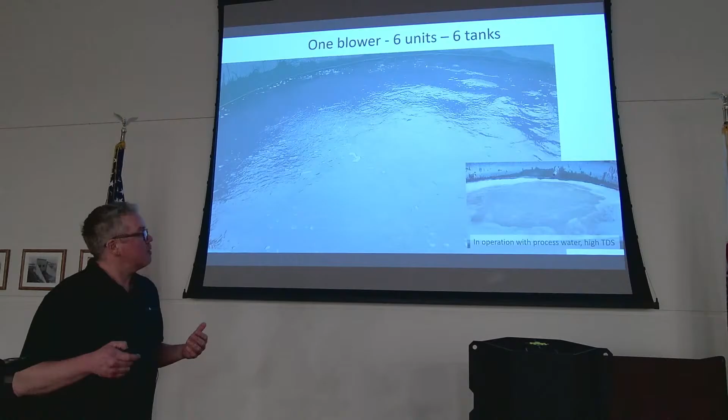This one was a loud one. Can I turn it down? Pardon how loud this is.

This was commissioned last September. This is in Webster, New York. This is also a milk plant, and we added the mixers. What's interesting about this is on commissioning, it's clean water right now, but you can see these eddy currents that are forming. So when that bubble rises, it's upflowing all that water, and then it sends it out radially from the bubble.

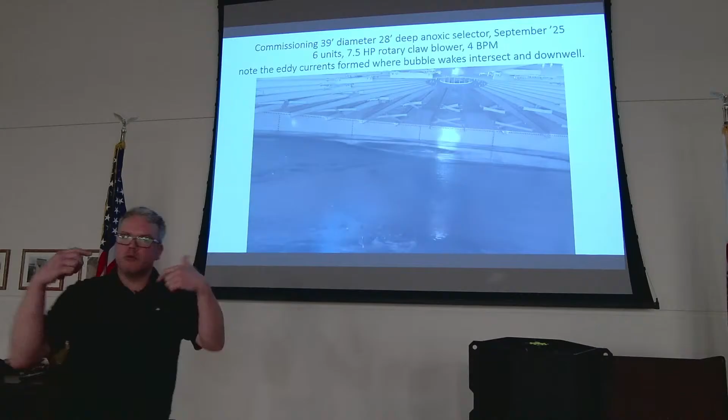When two bubbles' wakes collide, that's where you'll see downflow, and that's where you're going to see those eddies. So that's the currents being formed in there. This tank was, I think, 300,000 gallons, and 7.5 horsepower. So I think we're running at about 4.5 or something like that for 4 bubbles a minute.

What you'll notice, though, this is a very deep tank, and a bubble of this size will start to break up after about 25 feet. So you start to see that, but you're still upwelling quite a bit of water. And the bubble's held together in the lower depths, so you're not getting a lot of oxygen transfer at all. And once solids are in there and you up the viscosity a little bit, everything's held together even more.

This is an old slide. I like it because I spent a lot of time on it.

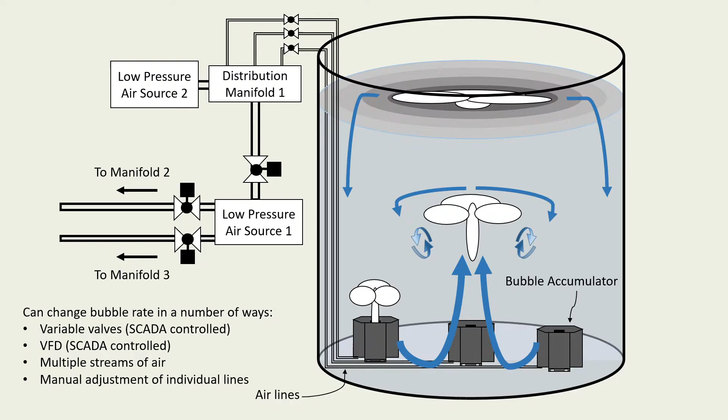But essentially what we're saying here is there's a lot of different ways to feed air. You can have as many controls as you want, but the main idea is you fill them with air, they'll make bubbles. The rate at which you fill air determines the rate of bubble release, so you can change the intensity of that mixing. So if G value is a concern and you wanted to do a gentle flocculation or something to slow everything down, you just decrease the flow rate of air.

How that can be done on a plant system: if you're using plant air, especially if you have common header pressure, very easy. It's just a variable control valve, variable orifice valve. If we're using a dedicated blower, then we just have a VFD that can turn up and down. And if running a couple different zones, we can individually adjust the rates with just some simple valving. You can use different air sources, throttle back and forth. It's designed to be really simple, but also really flexible in the application.

Just talking about power consumption just a little bit, it's just the compression rate of air. So comparing to high pressure systems, since we're not compressing to that high 100-and-some PSI and then dropping that back down to the pressure of the water, we simply need to break the head pressure. So where that diffuser is, it's basically an aeration grid, and then you fill it up with however much air.

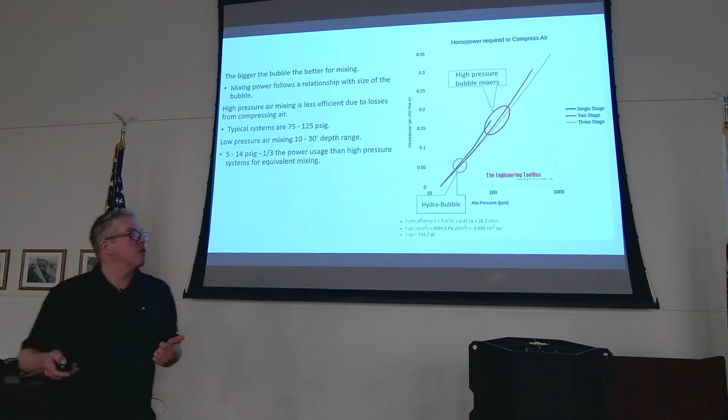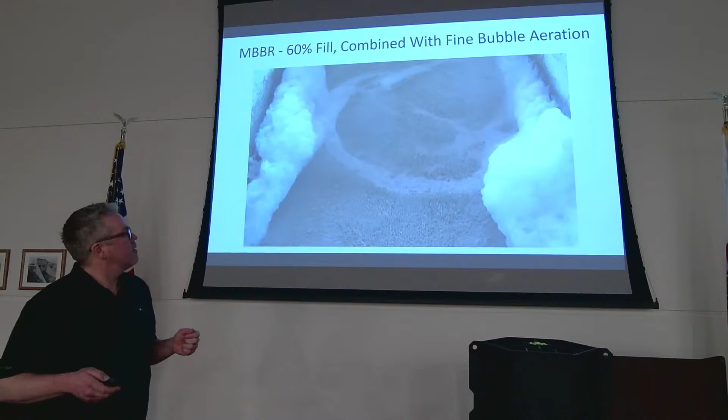This plant was running very low carbon, so we're seeing some bulking there, but that's more on the operational side of things. This is a supplemental mixing application, a landfill leachate. Unfortunately, this is the only video I have of this, but this is also MBBR media, called Mutag. They're these little wafers. They kind of look like little tiny Pringles. Very, very light, and they don't become neutrally buoyant until biology is formed on them.

So this whole tank was being mixed by a Xylem big banana mixer, but you'd have all this rafting in here. So you're basically stirring the tank, and it wasn't doing very effective mixing of that top layer. So you see this rafting, everything floating on the top. Like I said, this is the only video I have. This was right after they put this in.

I was told that just a couple days later, all that rafting was gone and everything was mixed into the tank. So that was just one of these units with a concrete base, and then we just threw it over the side of the railing there. And then I think they bought a compressor from Harbor Freight just to run air to this for those bubbles.

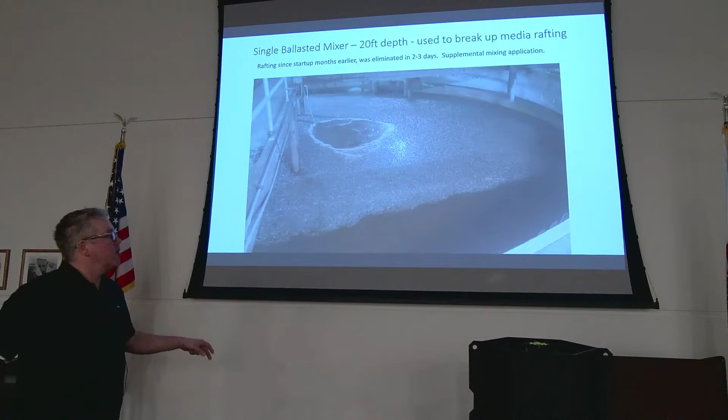I'll play that video one more time now you know what's happening. So you can see all the swirling down there. I know the video's not great, but that's lifting up, basically moving everything out from the center and then really mixing it up in the middle.

This is a municipal plant up in Wisconsin as well. This is clean water at this point, but this is running now. This is an Aquarius Nebula system, I'm not sure if you're familiar with those, but they're basically these cartridges with curtains of media on them, so they're fixed film, but it's just a whole bunch of surface area hanging on the thing. The whole idea here was to circulate water in between these cartridges and keep that zone anoxic.

At the plant now, they've taken the air down to about 1 bubble a minute for all these units, so I think it might even be lower than that, but about 1 bubble a minute. So there's 3 units in there, about 7 SCFM or so.